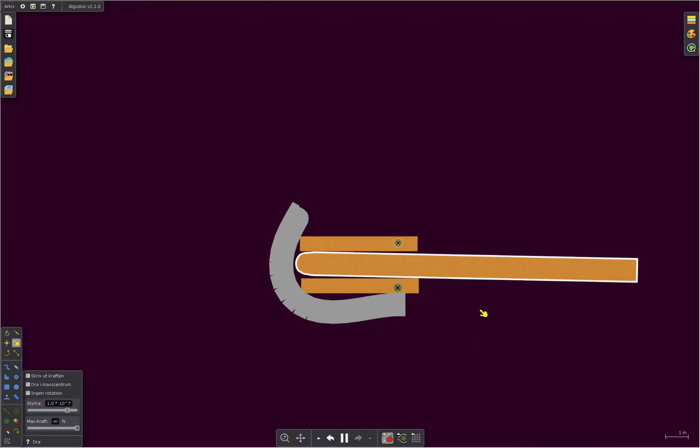What you're seeing, if you haven't figured it out, is a top-down view of the device. This is the sliding bit. These things are the rails. And this is a simple flat spring. It's U-shaped, but it's been tensioned over these rails.

And it simply works by you grab the end of the slide as you would, and you start pushing it against the spring. And as you can see, there's a large force pushing against you, so you have to overcome that from the spring really quite hard.

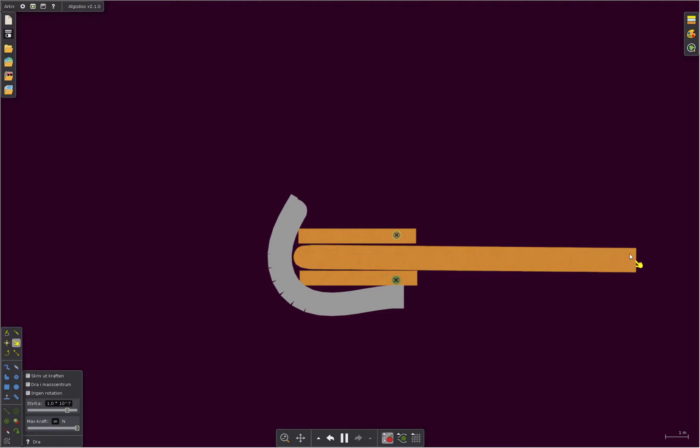And also I should point out the reason that there's a million little force vectors is because this software doesn't support elastic materials, so this spring is simply a composite of several different pieces, but it works like a spring.

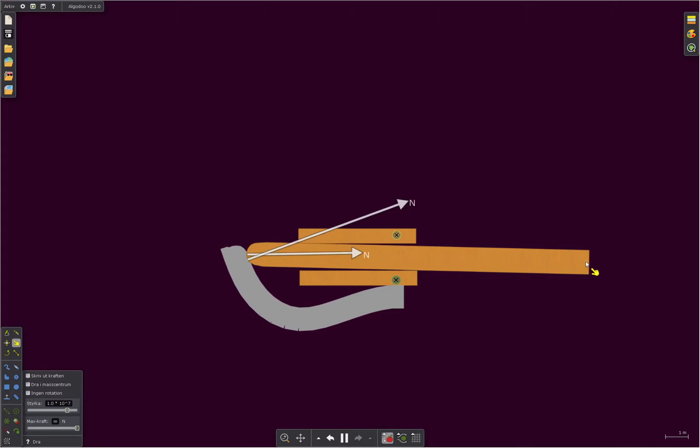And so you push this against the spring, and you have to overcome a lot of force at the beginning of the push, and then eventually the forces start pointing more and more away from you. I'll scale the arrows down so we can see them better. When you reach this point, all you have is friction. So as long as you can overcome that, you can go all the way forward.

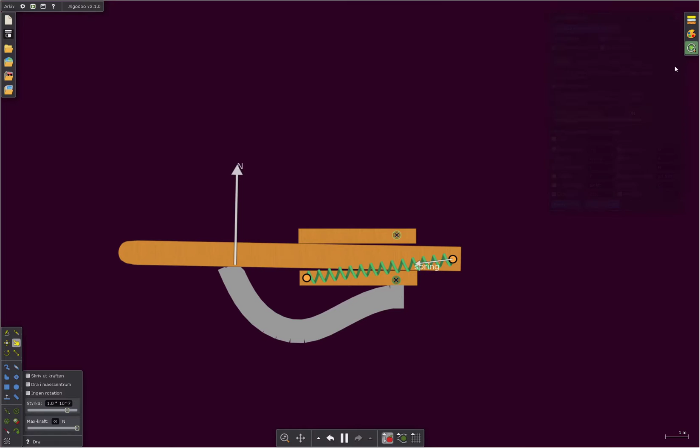You can catch an arrow, and we'll simulate the bow with another spring. And as you pull it back, you can see it doesn't help you yet, which is what we want. I'll show you the spring force as well. Remember, this spring is the bow, so the further you draw it back, the bigger this spring force will be.

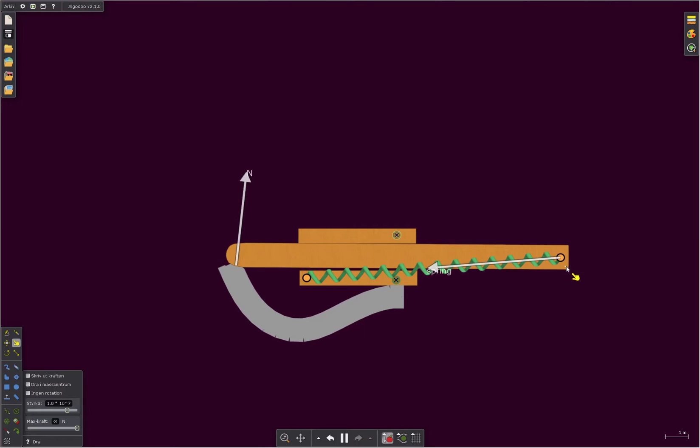And so when you get about halfway, the bow is pulling quite hard, and it becomes difficult. But at the same time, the assist spring is starting to help you. You can see that arrow is starting to cant towards you again, pushing this sled back. And if I release it, you'll see it's at an equilibrium somewhere around here. But that's a tuning thing for the real world.

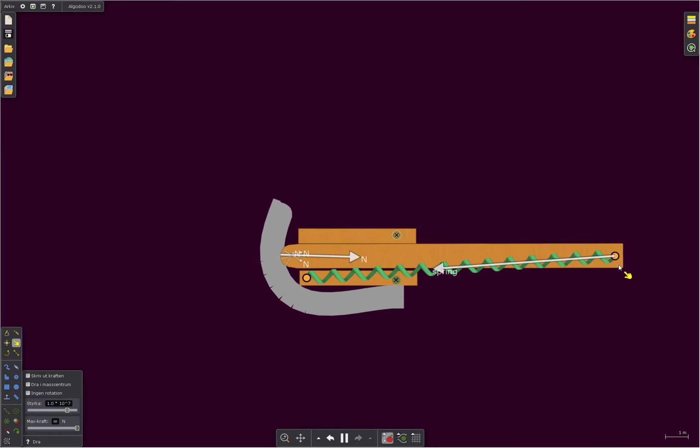And towards the end of the draw, the spring will help you the most, which is what we were looking for. And to simulate firing, I guess we can just remove this spring. So now the bow has been fired, and the string is back here somewhere. And you can start the whole procedure again.

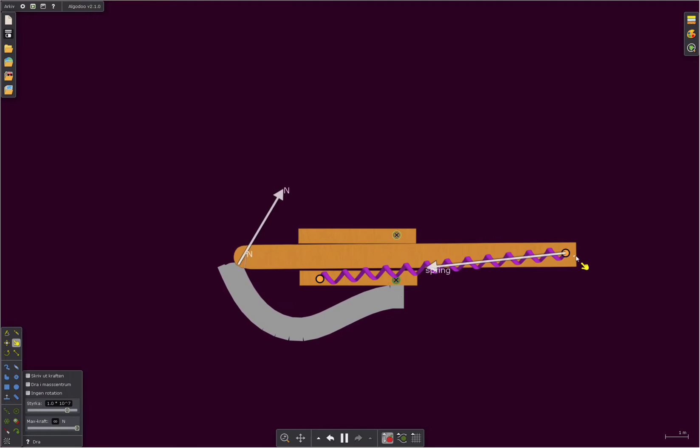Grab an arrow and start drawing the bow back. And right at about the halfway point, it starts to help you, and it helps you the most when you're reaching the end.

I think that's a simple solution. They could definitely have made this. If you can make a crossbow, you can make this. If you can make a sword, you can make this. It's basically a sharpened flat spring.

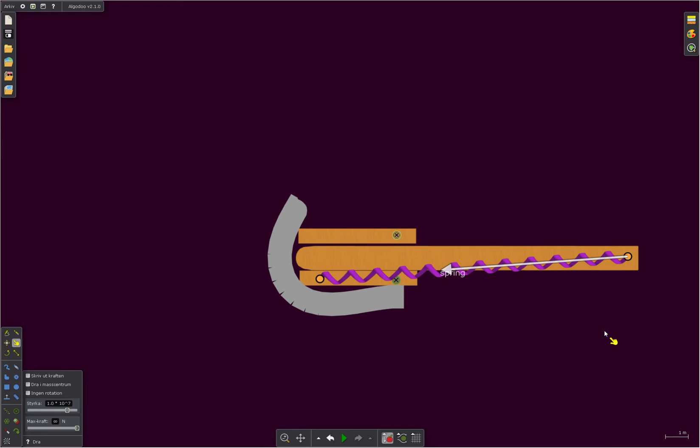Some problems might be the friction, of course. Maybe you can solve that with a roller at the end here, or maybe it's not a problem at all. I don't know. You can simulate friction in this software, but I don't think it's very helpful.

And secondly, of course, there's a lot of torque. So this spring, when it's pushing perpendicular to this slide, is going to press the slide quite hard against these rails. So maybe that's a problem. I don't know. That's it. If nothing else, I hope this was amusing.